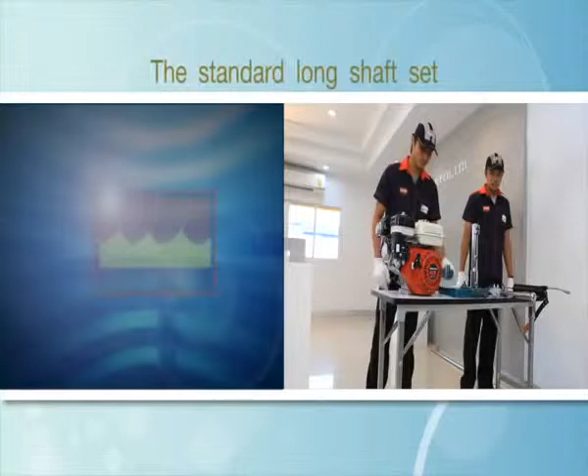The assembly of standard long shaft sets is conducted through the following steps.

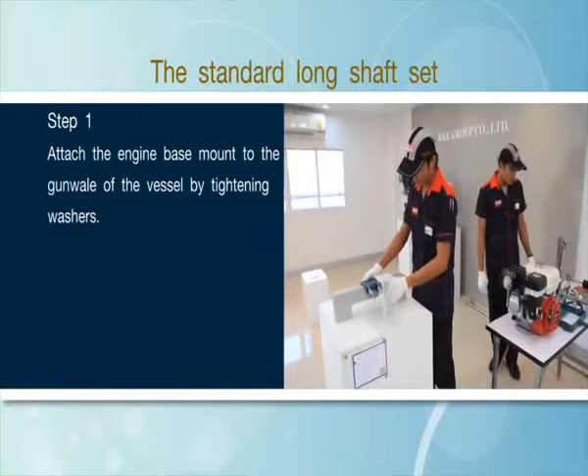Step 1. Attach the engine base mount to the gunwale of the vessel by tightening washers. Step 2. Attach the engine base to the engine base mount and tighten the nuts underneath.

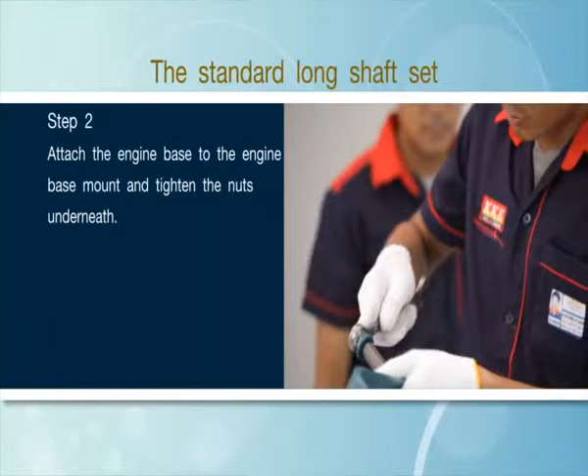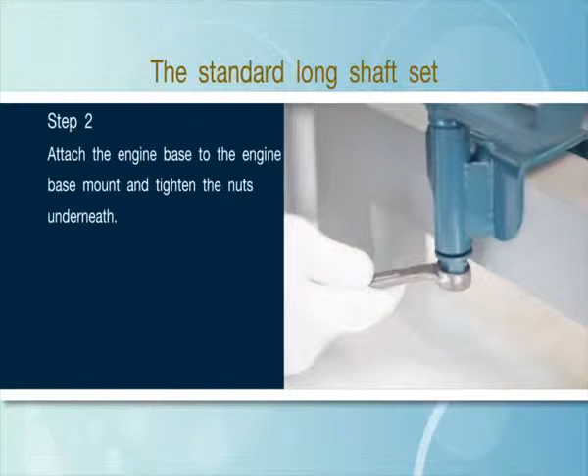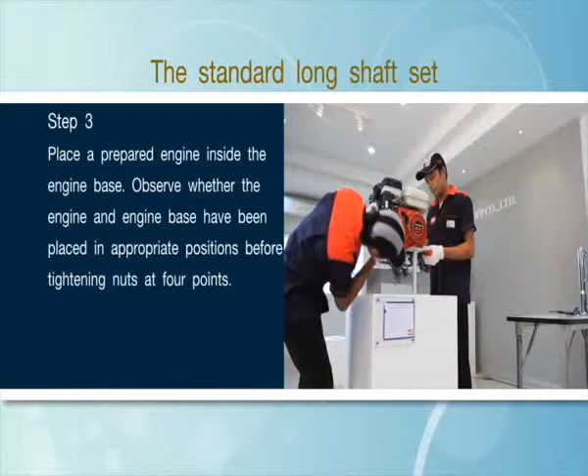Step 3. Place a prepared engine inside the engine base. Observe whether the engine and engine base have been placed in appropriate positions before tightening nuts at 4 points.

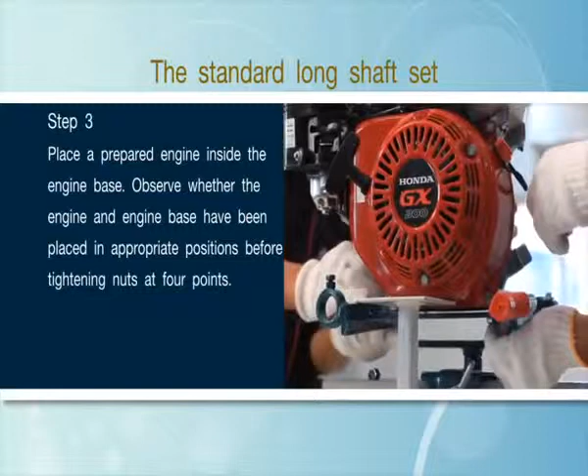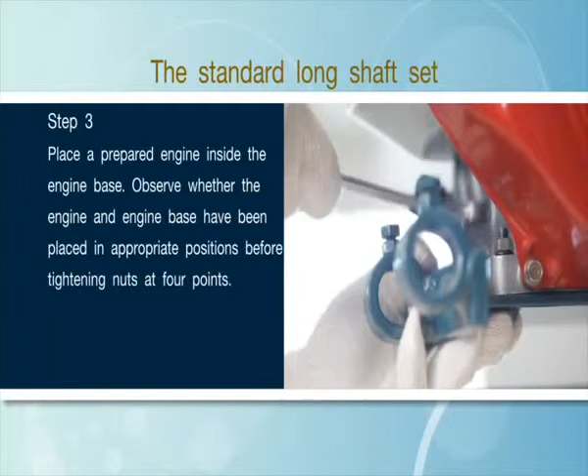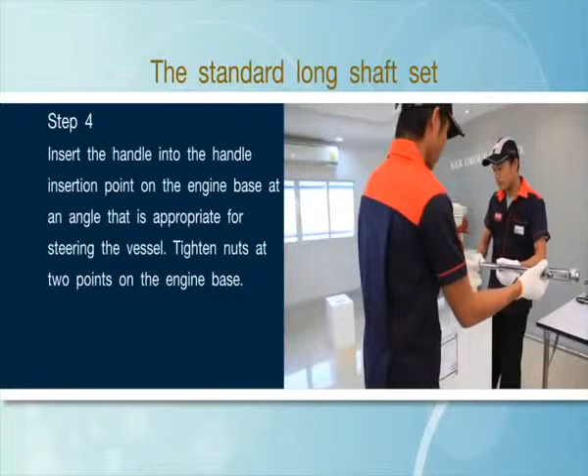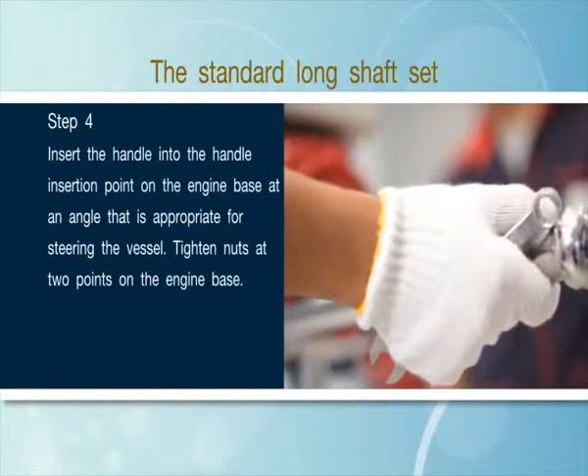Step 4. Insert the handle into the handle insertion point on the engine base at an angle that is appropriate for steering the vessel. Tighten nuts at 2 points on the engine base.

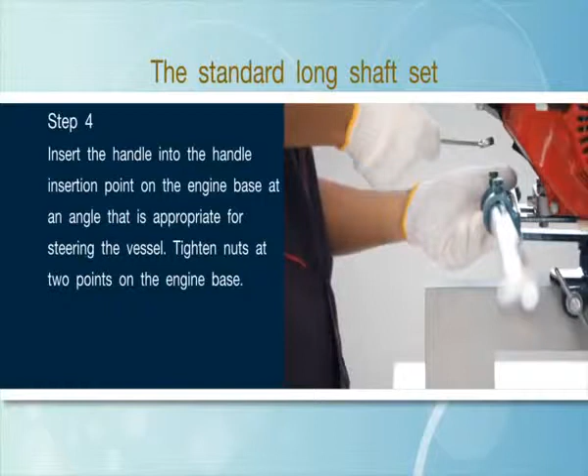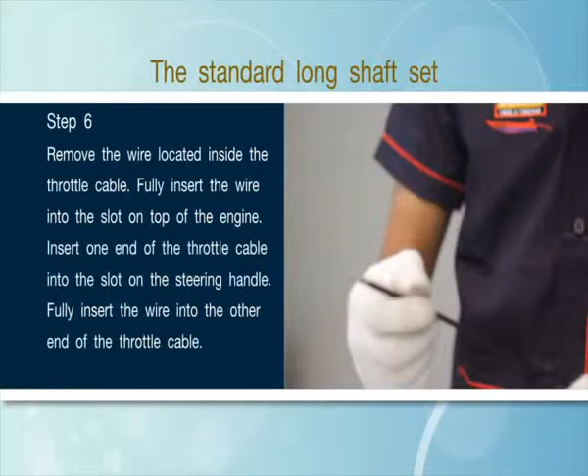Step 5. Unscrew the washers fastened to the filter plate that covers the throttle of the engine. Step 6. Remove the wire located inside the throttle cable.

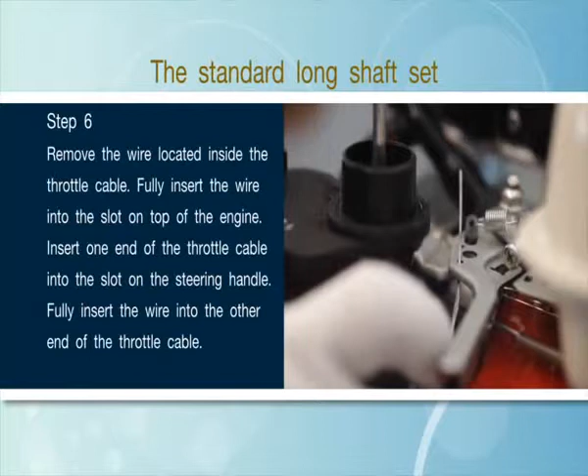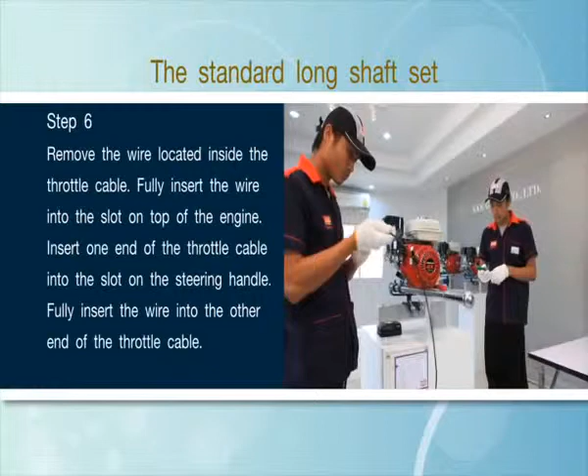Fully insert the wire into the slot on top of the engine. Insert one end of the throttle cable into the slot on the steering handle.

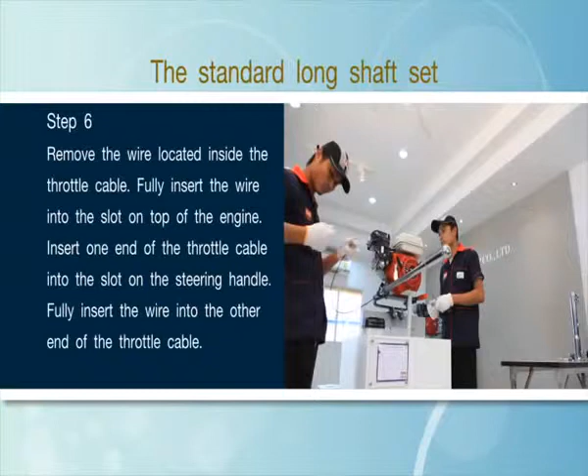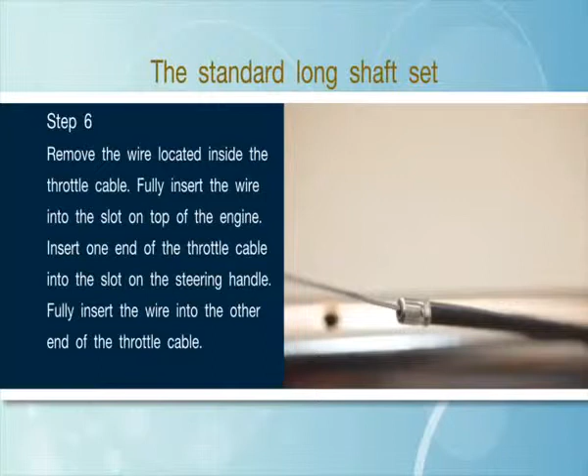Fully insert the wire into the other end of the throttle cable. Tightly clamp the black wire by tightening nuts to prevent the wire from slipping.

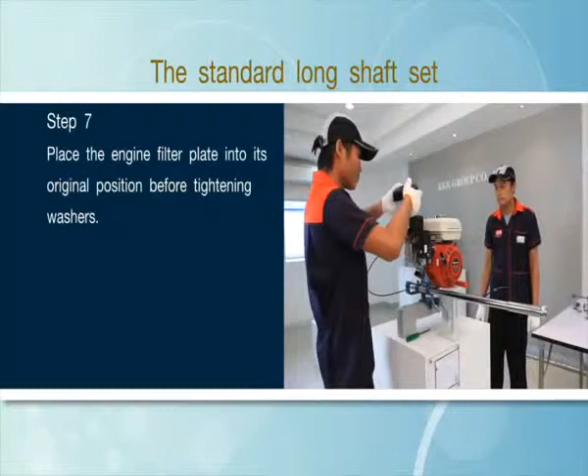Step 7. Place the engine filter plate into its original position before tightening washers.

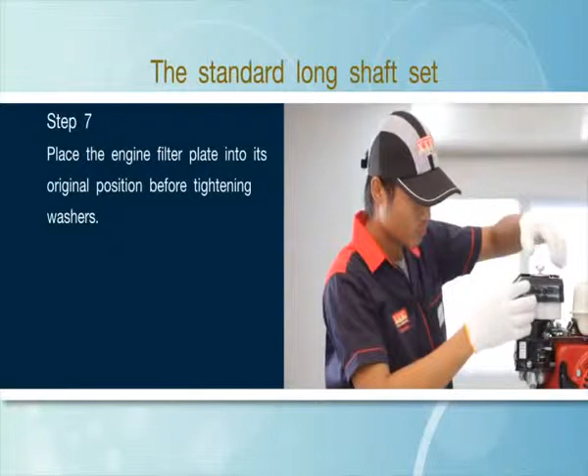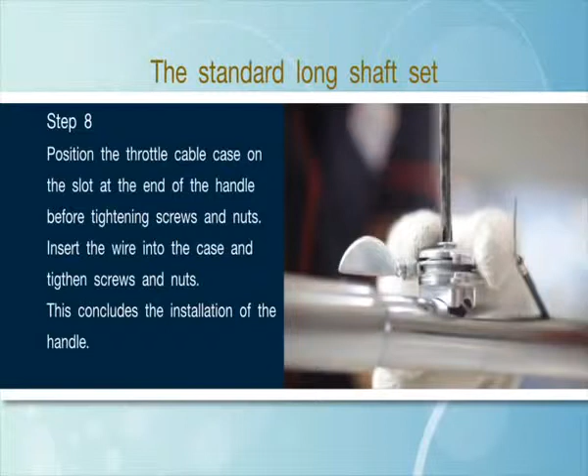Step 8. Position the throttle cable case on the slot at the end of the handle before tightening screws and nuts. Insert the wire into the case and tighten screws and nuts. This concludes the installation of the handle.

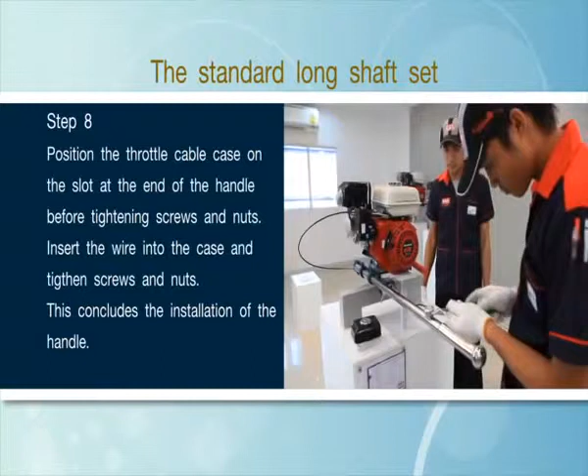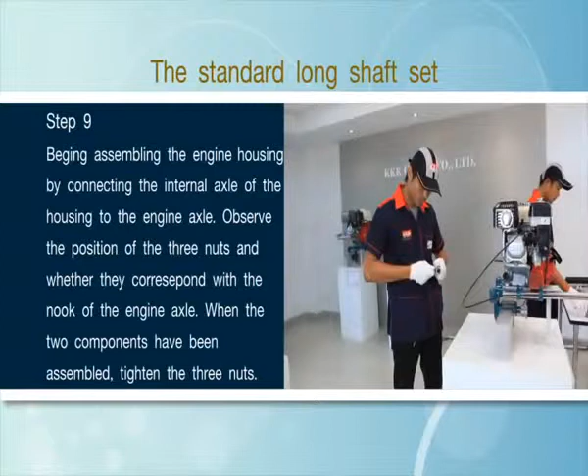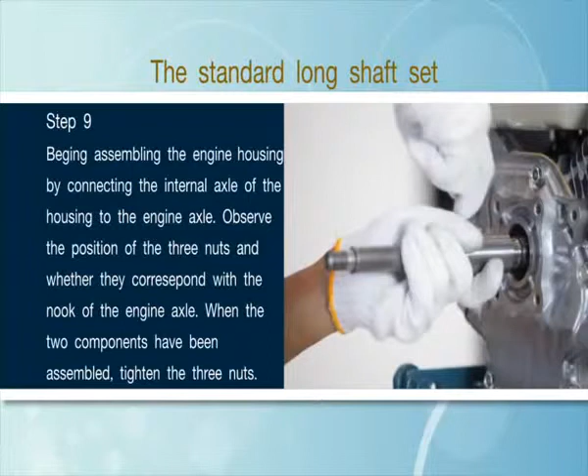Step 9. Begin assembling the engine housing by connecting the internal axle of the housing to the engine axle. Observe the position of the 3 nuts and whether they correspond with the nook of the engine axle. When the 2 components have been assembled, tighten the 3 nuts.

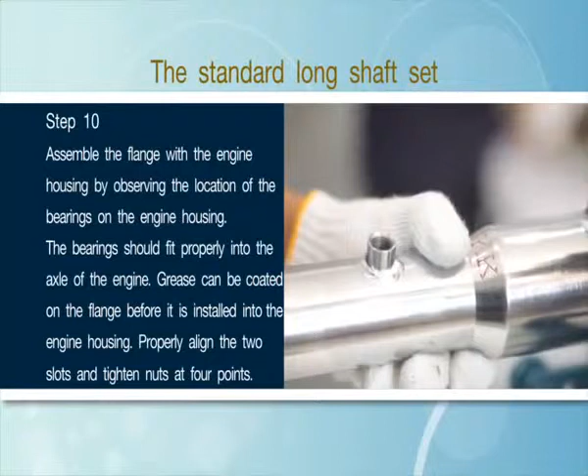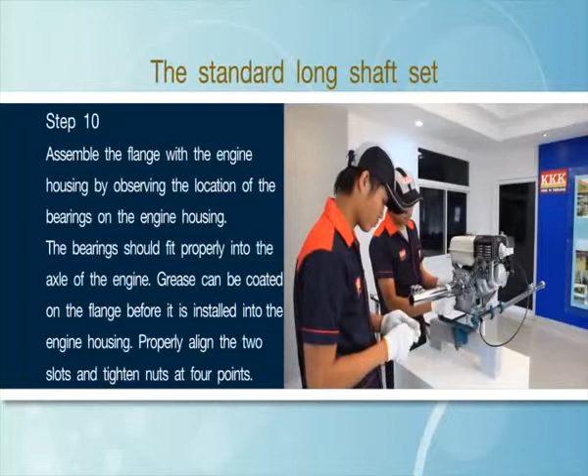Step 10. Assemble the flange with the engine housing by observing the location of the bearings on the engine housing. The bearings should fit properly into the axle of the engine. Grease can be coated on the flange before it is installed into the engine housing. Properly align the 2 slots and tighten nuts at 4 points.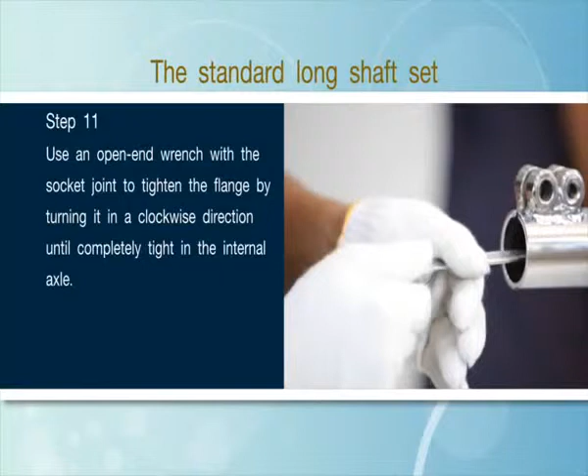Step 12. Grease both grease points and tighten washers over the flange. Grease can be coated on the flange if not already done in accordance with Step 10. Pack grease into the flange until completely coated.

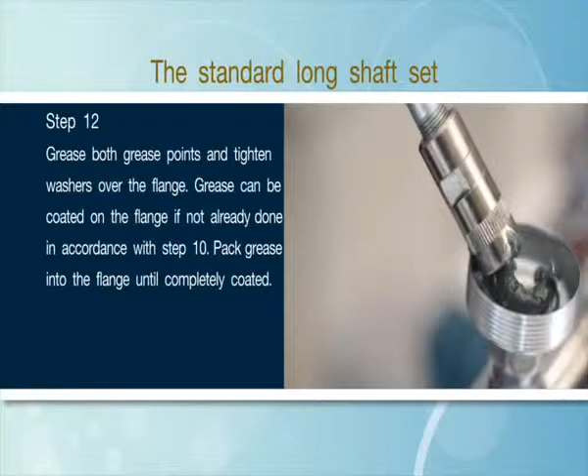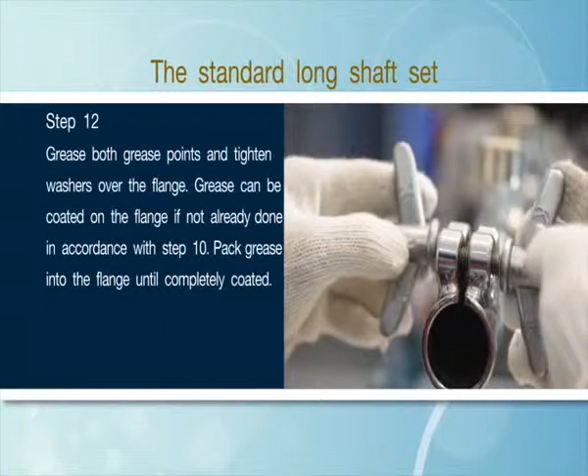Step 13. Install the long shaft onto the flange or the socket joint and tighten 2 washers.

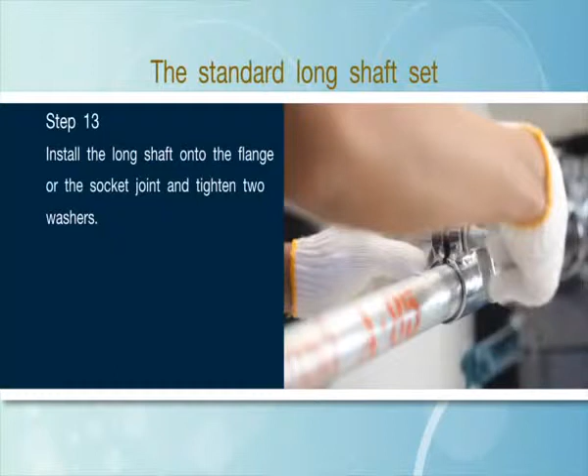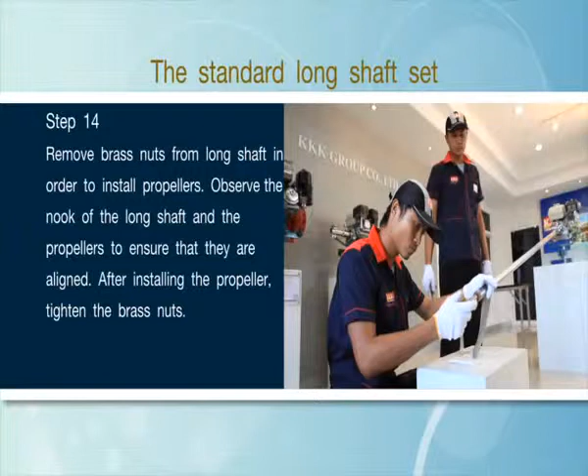Step 14. Remove brass nuts from the long shaft in order to install propellers. Observe the nook of the long shaft and the propellers to ensure that they are aligned. After installing the propeller, tighten the brass nuts.